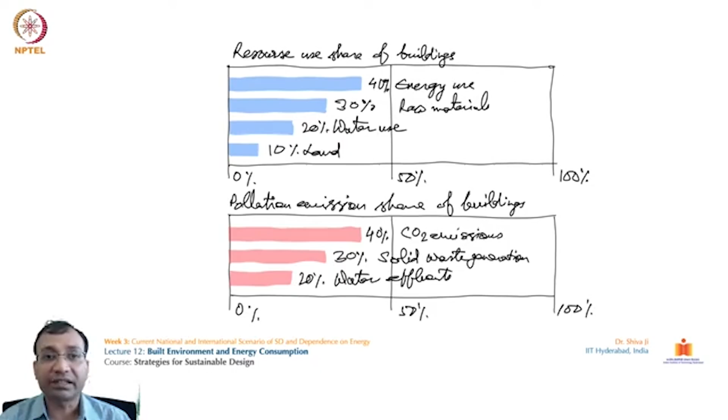So there are two big areas for potential savings. It's evident from the previous slide that buildings are the largest consumer of resources and energy, and also the largest emitters. From the opportunity perspective, as a designer, architect, and engineer, there is a huge scope and potential for savings on all of these factors. Compared to other industrial sectors like industry and transportation, buildings are at the top, so there is a huge potential for improvement in optimizing energy usage and consumption, and in sustainable sourcing of materials and raw materials required for the built environment.

If you see the numbers given on the left side of this illustration, it shows that the building sector accounts for almost half of the energy consumption in the United States. This is just an example from one country. The United States is one of the advanced countries, and there the contribution of energy serving buildings alone is almost 50%.

Buildings account for over 70% of total US electricity consumption and are responsible for over 40% of CO2 emissions. So of the total electricity consumed, 70% is taken by the buildings alone.

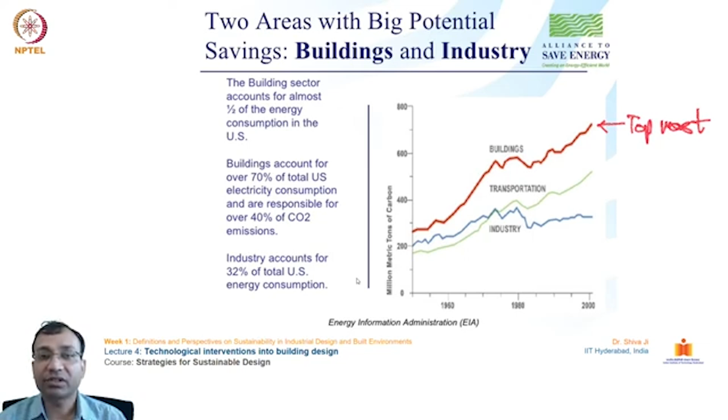So here, what could be the benefits for the buildings, building owners, occupants, civic bodies, and political administrative agencies for improvement of such efforts? It is given at three scales: one, individual building scale; second, at a district scale, like an urban scale; and the third one is at the city scale.

So what could be the benefits if we work for building efficiency and on-site power generation, and if we work for storage of that on-site generated power for consumption at later times? The common benefits are listed here.

More efficient resource use, managed resources consumed, reduced costs for energy and other resources, reduced resource use, and reduced demand on the electricity grid. Taking power from the electricity grid exerts a lot of impact and pressure on the overall system, because that power has to be generated somewhere and transported to your place. In the transportation itself, a huge percentage of that power gets lost.

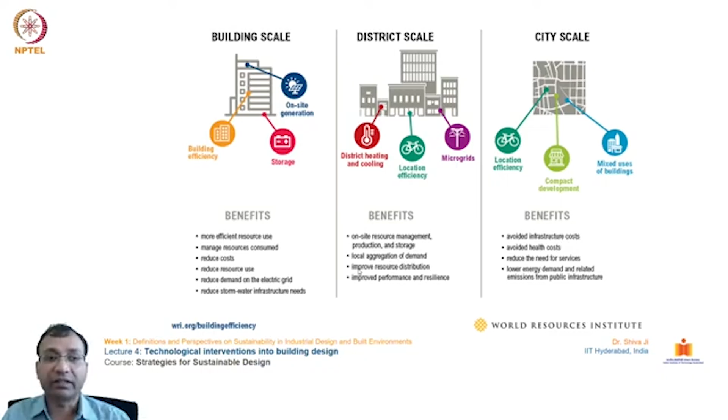And of course the lower energy demand and related emissions from public infrastructure. Since the public infrastructure will have better capacity to serve the people, the per person emission will get reduced significantly.

Okay, next, if you see over here, how to design and build an energy efficient building. Well, this slide we have discussed earlier, but I have kept it here again to remind you how we can go in the approach. The first approach talks about reducing the demand. The second one talks about using renewable resources and avoiding non-renewable resources. And the third one, even if we need to use such resources, we must use them with as much efficiency as possible.

So on the left hand side you can see what are the strategies for employing such in the designs of our buildings and other products. So using the concept of bioclimatic architecture, the shape, orientation of the building, solar protections, passive solar systems can be installed in the building to take the maximum advantage of the solar direction, the solar availability of the sun, the prevailing winds and all of these things, and even the topological characteristics and topography.

The second, high performing building envelope. Thorough insulation should be there to minimize the losses. High performing glazing and windows, air sealed construction, avoidance of thermal bridges. The third one, high performance controlled ventilation, mechanical insulation, heat recovery.

So heat recovery is also one of the options which several projects are using these days, where they are recovering heat from services. If there is a heating mechanism installed in a building, or if there is a cooling mechanism installed in that building, the energy which was invested for cooling that particular air should be harvested back as much as possible if there is any fresh air change or any such activity.

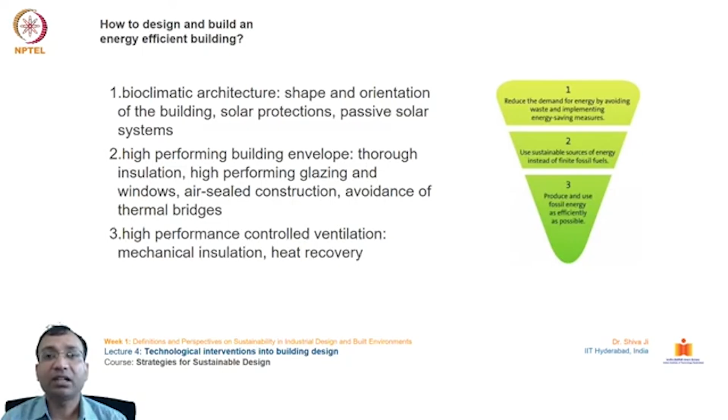So the cool air, if it is exiting that building, can be diverted to other ancillary activities. So that is the purpose of this, to maximize the use of the energy invested in any component of the building. So how can we make use of this bioclimatic design? I'll quickly explain this topic over here.

It takes account of the climate and environmental conditions to help achieve thermal and visual comfort inside. So bioclimatic design takes into account the local climate to make the best possible use of solar energy and other environmental sources rather than working against them. So bioclimatic design includes the following principles. There are two principles I'll explain briefly.

The shape of the building has to be compact to reduce the surface in contact with the exterior of the building, the surroundings of the building. The building and especially its openings are given an appropriate orientation, preferably towards the south. Interior spaces are laid out according to their heating requirements, though these directions will vary depending upon the location of that site and the building across the planet.

So from the northern hemisphere to the southern hemisphere, the orientations may go completely opposite. So we have to take care of such calculations depending upon the location on the globe. The second one, appropriate techniques are applied to the external envelope and its openings to protect the building from solar heat in winter as well as in the summer.

Passive solar systems collect solar radiation, acting as free heating and lighting systems. The building is protected from the summer sun primarily by shading, but also by appropriate treatment of the building envelope, the use of reflective colors and surfaces. For example, if we do not want much heat gain from the sun in the summer months, we should use reflective materials to reflect back the heat quotient of the sun's rays.

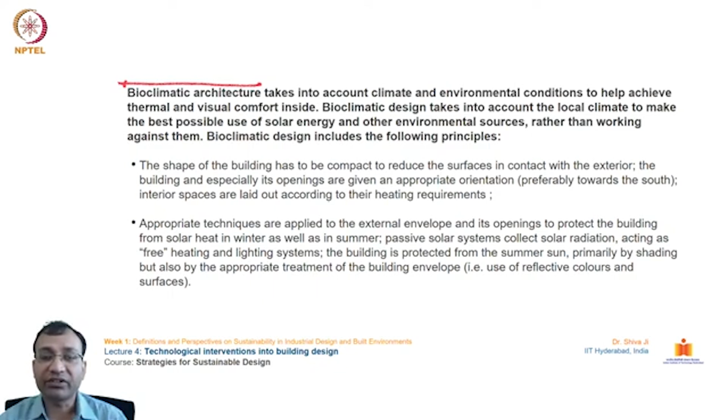And in winter, if we want that heat to come inside, then maybe we can use absorptive materials which allow heat retention in the building. Similarly, thermal insulation is a low cost, widely available, proven technology that begins saving energy and money. It reduces emissions because it helps the system in an indirect way. It's reducing the losses which are happening in the process of heating or cooling.

So this insulation is very important to improve the overall efficiency, because a major portion of energy gets lost just because of weaker insulation. So well-installed insulation in the building ensures energy efficiency in every part of the building. So how can this be done? You see, there are two points over here.

An exterior wall is well insulated when its thermal resistance, the R value, is high, meaning the heat losses through it are small, a reduced U value. Insulation is a key component of the wall to achieve a high R value for the complete wall. The thermal resistance R of the installed insulation products has to be as high as possible.

So you see, every material has a certain thermal resistance. For example, brick, concrete, wooden panels, stone materials, timber, and these days we are using aluminum, steel, mild steel, and glass. So all these materials have some R values, which is the thermal resistance.

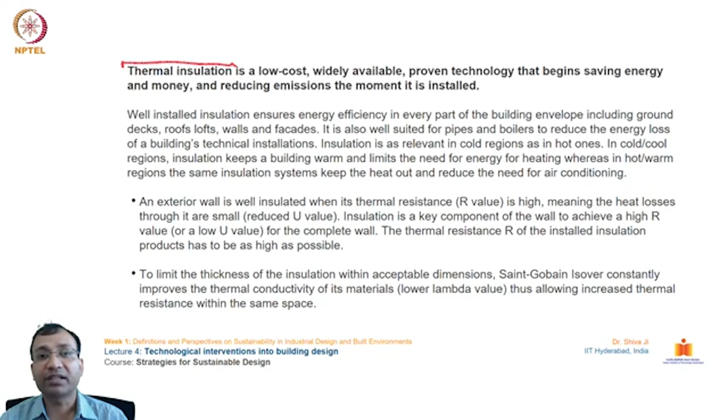The second one talks about limiting the thickness of the insulation within acceptable dimensions. There are some companies like Saint-Gobain who have launched glass materials which have lower U values as compared to conventional glasses, which in turn helps minimize the heat load. These glasses are called reflective glasses. They reduce the heat component in the sunlight, and as a result, the air conditioning load on any space is minimized significantly.

The next one I would like to talk about here is air tightness. This is related to convection. There may be loss of energy from inside to outside or from outside to inside. So with air tightness we can ensure the maximum efficiency of the energy systems. This is also part of the overall strategy, to use air tightness to minimize the losses by convection.

So this reduces, minimizes or breaks the air leakages happening anywhere in our ducts or anywhere from the interior spaces to the outside. It checks the gaps and cracks in the building, the construction or the interior spaces, or even in the false ceiling, in the windows, in the doors, to maximize the effect of the invested energy. So how can this be done?

The details that are vital to achieving good air tightness need to be identified at the early design stage. The next and equally important step is to ensure these details are carried over into the construction phase. Careful attention must be paid to sealing gaps and ensuring the continuity of the air barrier. It is far simpler to design and build an airtight construction than to carry out remedial measures afterwards, because the remedial measures may not work properly. So it is always recommended to go for such details at the time of the design itself.

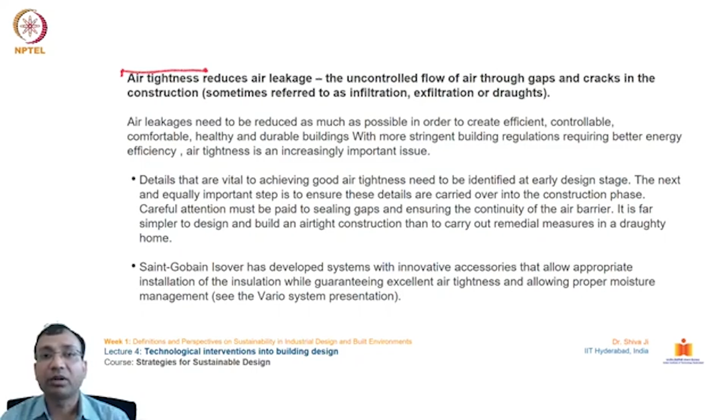So see how different companies, the private companies, are also coming to the rescue of the cause of ecological balance. Saving energy and saving resources must become the motto of each and every organization, whether it is government or private or every manufacturing unit, to serve the overall purpose of bringing energy efficiency and efficiency overall in resource consumption.

The next one it talks about here is ventilation. How the ventilation can be controlled for bringing fresh air, for cooling it, for bringing it to the desired temperature. If you do not insulate properly and ventilate too little, you risk warm humid air condensing on the cool, poorly insulated surfaces, as we generally observe in the humid months. Sometimes we observe condensation and water droplets forming. That's because of bad insulation processes carried out at the time of the fabrication or manufacturing of that unit.

So we have to check such things, which in turn will further give rise to the growth of mold and fungi in the interior spaces, and which can further cause damage to the health of the occupants. The next one talks about a controlled ventilation strategy that will satisfy the fresh air requirements of an airtight building. Air infiltration or opening of the window cannot be considered an acceptable alternative to the design ventilation.

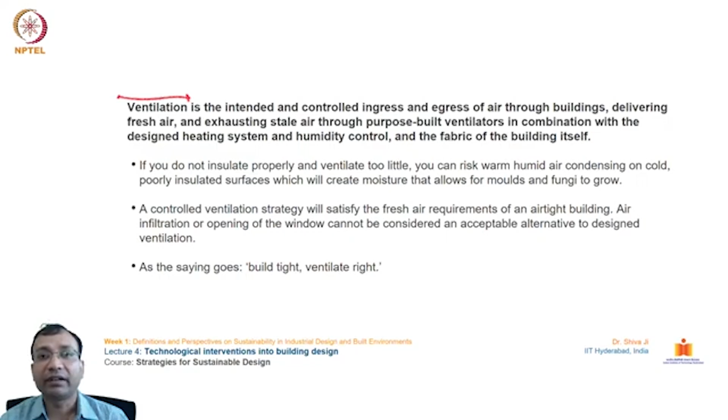Okay, the last one, as the saying goes, build tight, ventilate right. So it is very important that the whole system of the building should be completely airtight, so that the intended resource consumption and energy consumption can be achieved. So it is very important to take care of these smaller details at the time of construction only, because it will be very difficult to rectify them once the construction is over.

So if you see the overall thermal energy consumption pattern, these red lines represent the traditional optimization thermal energy consumption. The blue one talks about predicted thermal energy consumption, and the green one is the building information modeling optimization thermal energy consumption. So what happens in the traditional optimization method, what happens when we predict, and what happens when we take help of a BIM model in the consumption pattern.

So these are the latest tools, softwares and mechanisms such as building information modeling. They have added quite a lot to energy efficiency and to managing any building or the built environment efficiently for operational resource consumption, such as energy. Energy is one of the components which a building uses as long as it is functional. So you can see this red line, which is the traditional optimization thermal energy consumption,

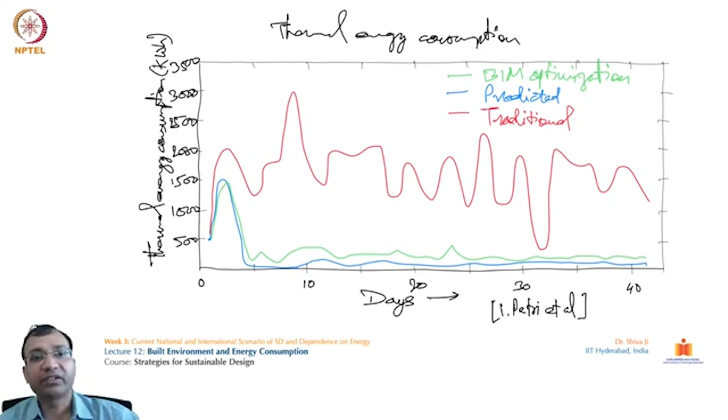which is always in the higher scales. Okay. The observation was done over a range of 40 days. So how it has fared in the traditional way, how this can be taken care of by going for predictive models, and how BIM has finally resulted with the help of all of these methods. By employing methods such as insulation and air tightening, it's quite less than what is being used in the traditional systems. So we can see over here the effects which a BIM model structure can provide.

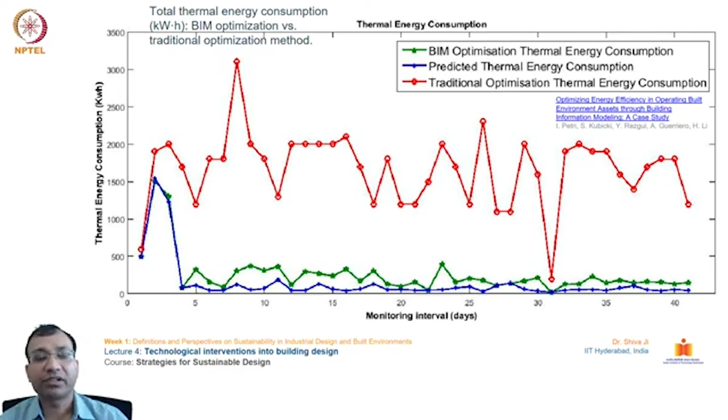Here, this chart, I think we are coming towards the end of this lecture. This chart provides the building energy end use consumption in cold and moderate or warm climates. This is from the year 2012. The first circle shows the energy used in the cold climate countries, around 45% for heating spaces. On the right side it talks about the energy used in the warm countries.

So in the colder countries, 45% of the energy is used in heating their spaces, which is the largest component among all of these. The next one is water heating, because in these places the water gets frozen, it becomes ice, and the building services cannot run. The water supply and sanitation cannot function. So in these places, there are provisions to keep heating the water on a regular basis so that it doesn't freeze in the pipes. These two take almost 55 to 60% of the total energy requirement of a building.

And on the contrary, if you see on the right side, here cooling becomes very important. Okay, so traditionally in these buildings in the warmer countries, space cooling requires only 3%. Compared to the counterparts from the colder countries, this is very little.

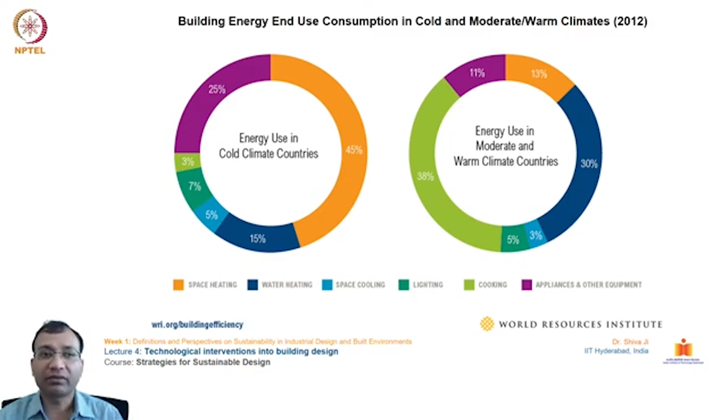So I think lighting remains more or less closer to each other in both of the contexts, from 5% to 7%. Space cooling also is relatively lower in both of these, from 3% to 5%. But heating is changing quite a lot, and in this scenario on the right hand, in warmer countries, we are seeing the range of cooking requirements, which are very high, up to 38%. So how can these most efficient buildings be achieved?